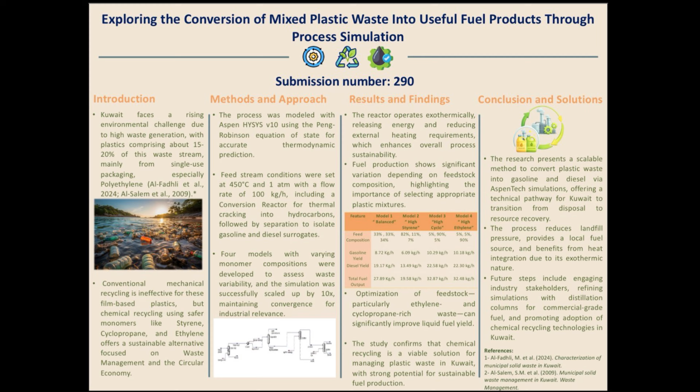our fuel yield. One of our most significant findings in HYSYS was that the reactor operates exothermically. This means the process releases energy, allowing for heat integration that reduces the need for external heating, making the entire system more sustainable and cost-effective. Looking at our results, Model 3, our high cyclopropane feed, emerged as the winner, producing a total fuel output of nearly 33 kg per hour. This data proves that by optimizing the feedstock, we can significantly maximize gasoline and diesel production.

Finally, we validated the feasibility of this project by scaling the simulation up by 10 times. The model maintained perfect convergence, proving that it is ready for industrial application. Our solution offers a technical roadmap for Kuwait to transition from simple waste disposal to resource recovery. By reducing landfill pressure and providing a local fuel source, we are bringing the circular economy to life.

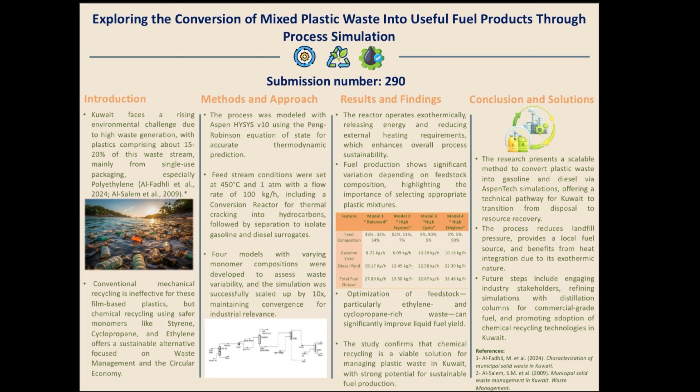And now I will be diving deeper with you into the simulation that we have created. As you can see here, we have created 4 models, and I am going to start with the first model. We have the mixed plastic feed in the beginning that goes into a conversion reactor, then into a cooler, into a separator, a splitter, and lastly into a second splitter. Now, as for the composition, for the mixed plastic feed, we have chosen styrene, cyclopropane, and ethylene as they represent the monomers of the polyplastics that we want, because polystyrene, polypropylene, and polyethylene do not exist in the component list of Aspen HYSYS. And in this feed, we chose equal amounts of each.

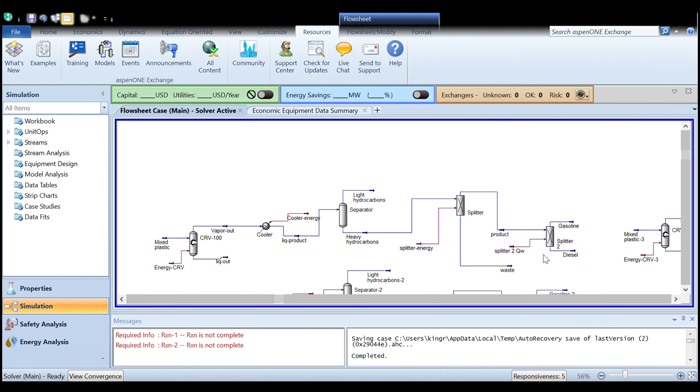Then we put them into a conversion reactor to break the monomers down further. Then we took that vapor and put it into a cooler to cool it down from 450 Celsius to 440 Celsius. Then we took that liquid product and put it into a separator to separate the light hydrocarbons and the heavy hydrocarbons, as our targeted products are gasoline and diesel, which are both heavy hydrocarbons. Then we put it into a first splitter to split both gasoline and diesel from the other heavy hydrocarbons that are in the feed together. Now, as for gasoline, we chose cyclooctane to represent it and hexadecane to represent diesel.

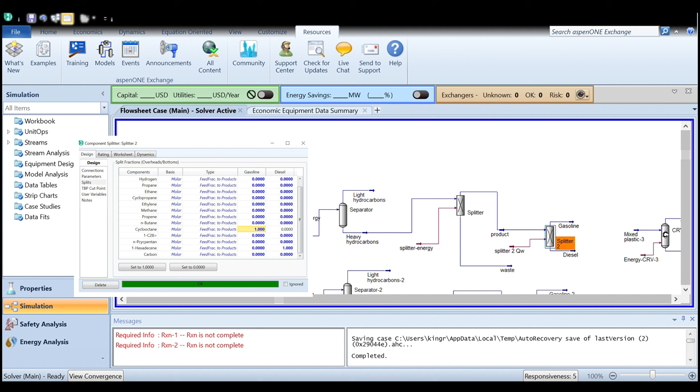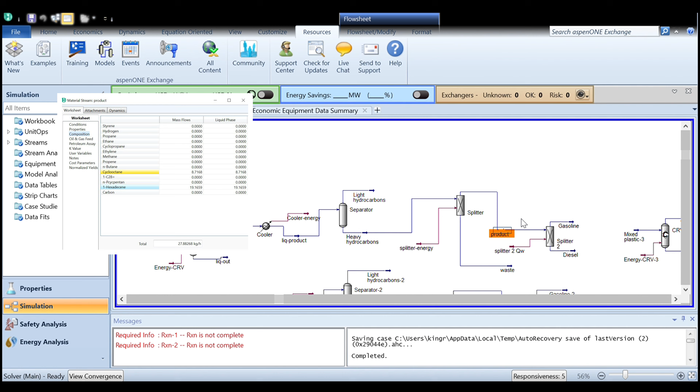So then we took that product and put it in another splitter, and this splitter splits both of them evenly, as we mentioned. Now, we can see in the product stream the mass fractions of each product. For the gasoline, we have 8.7, then 19.1 for the diesel. Now, why do we have multiple models? Because we wanted to see how different mass fractions of each monomer affect the product. In this second model, we chose a composition that relied heavily on polystyrene, and this made the product heavier on hexadecane. As you can see, we have a larger number.

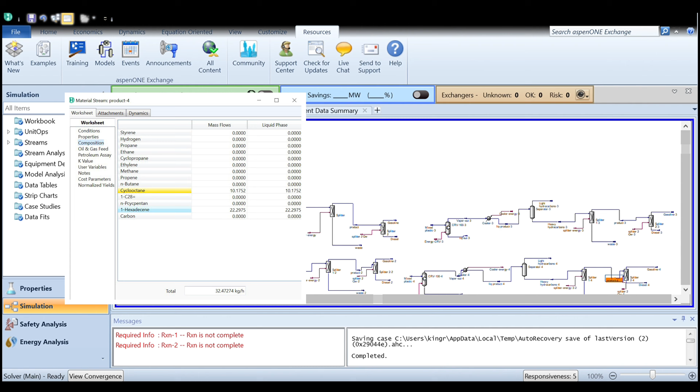Then, here, this feed relied heavily on cyclopropane, which made the feed more composed of hexadecane. As you can see, it is almost double the amount in the beginning. Lastly, in the fourth model, we chose a composition that relied heavily on ethylene, which gave us a product that is more hexadecane heavy. And as you have noticed, both model 3 and 4 have almost the same amount of both gasoline and diesel. That is because both ethylene and cyclopropane have similar chemical structures and are heavy, so they produce the heavier products.

In the end, our simulation confirms that a cleaner, more efficient future for Kuwait is technically feasible. Now, it's time to turn these digital insights into industrial impact.